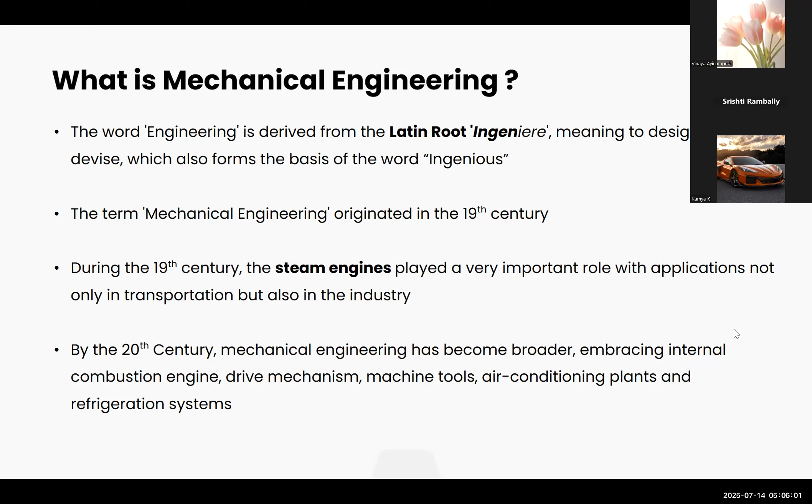The field of mechanical engineering deals with many physics concepts such as forces, materials, energy, fluids, motion, and design. Mechanical engineers usually use this knowledge to create products and solve real-world problems. Scientists normally emphasize the discovery of physical laws rather than just applying them to create new products, while engineers apply the knowledge of mathematics, science, and materials to create better technologies.

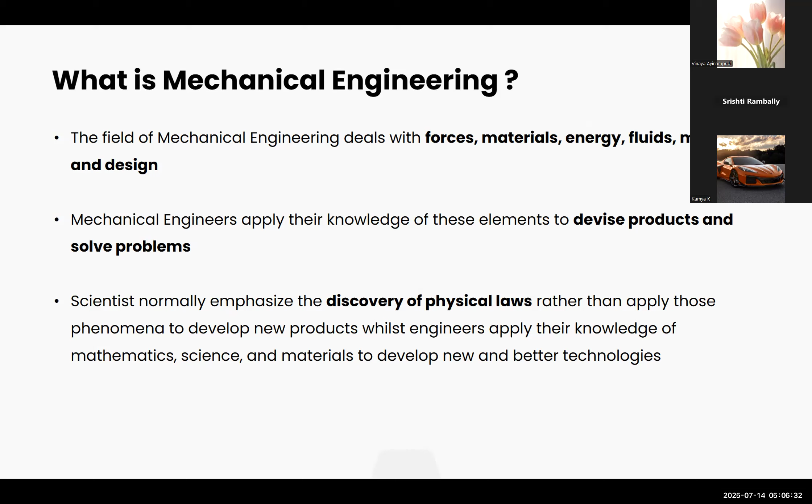And at the end of the session, we will also get an idea of what computer-aided engineering is.

Hello everyone, I'm going to take the next part of the mechanical engineering workshop. First, let us know what is machining.

Machining is a manufacturing process where we remove material, usually from a metal block, to shape it into a final desired part. This is done with very high precision, which is essential in industries like aerospace, automobile, and robotics. The three main machines used for machining are the lathe, the drilling machine, and the milling machine.

So you can see an example here, starting from a solid metal block, from which we carefully remove material and end up with a cylindrical shaft. This transformation is what machining is all about.

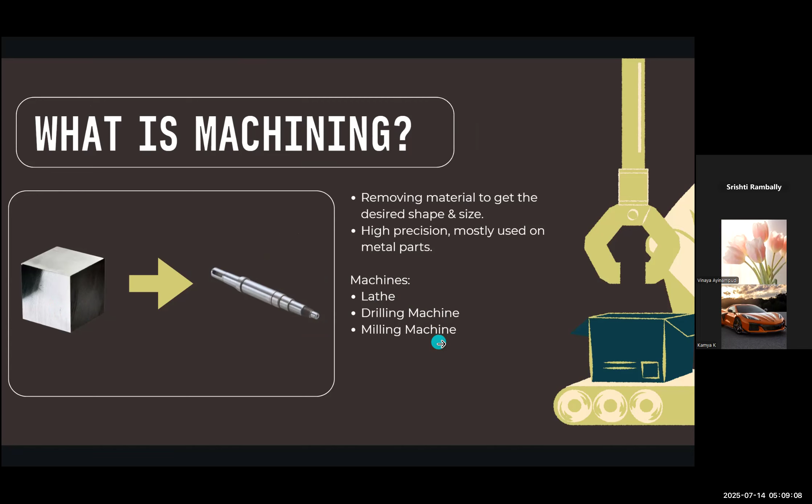Now let's dive into the lathe, often called the mother of machines, because it is one of the oldest and most versatile tools. In a lathe, the workpiece spins and a stationary cutting tool removes material. The key operations include facing, making the end of the cylinder flat, then turning, which is reducing the diameter along its length, and then threading, which is creating screw threads.

Here's the image which shows the labeled diagram of a lathe. You can spot the headstock, which holds the spindle, and the chuck that grips the part, and the tool post, which fits the cutting tool. The tailstock supports the long part, and the carriage, which moves the tool.

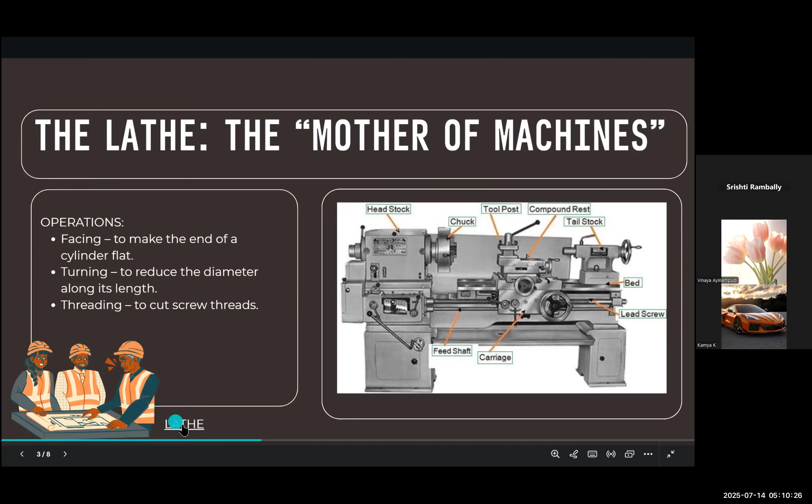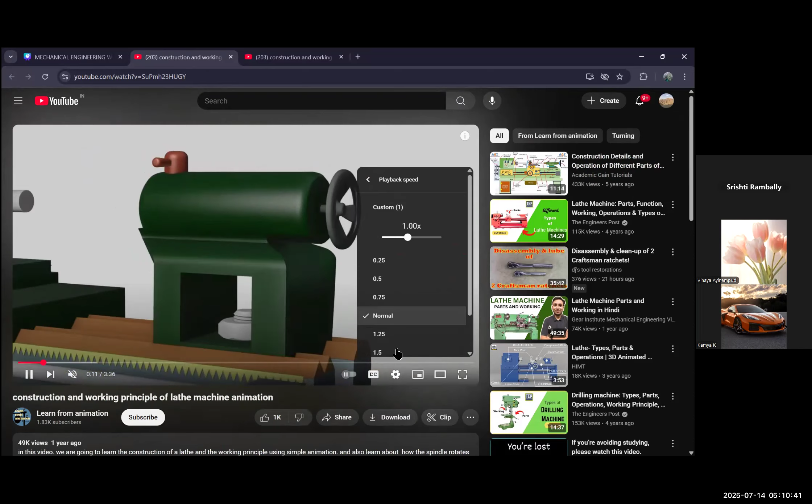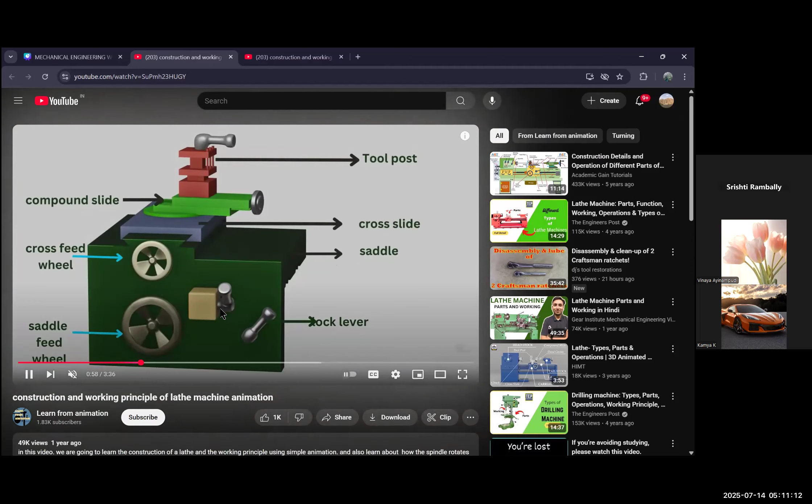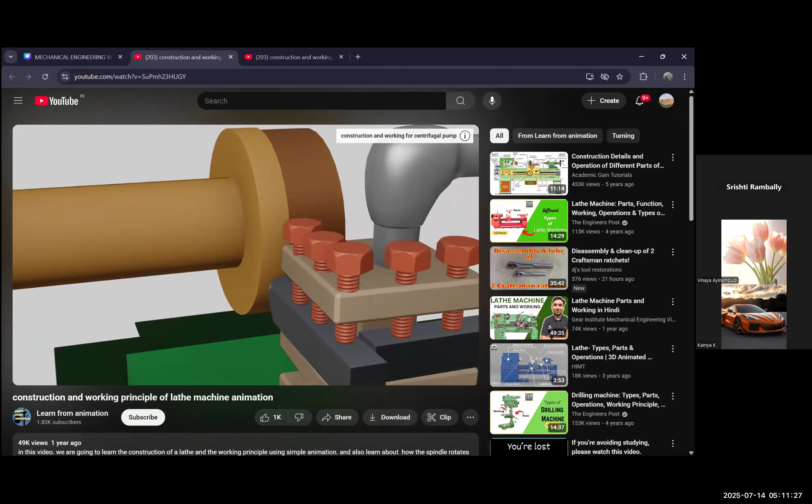I'm going to show you a 3D animation so you can understand the real working of the lathe. That's the headstock. That's the carriage. Those are the parts of the carriage. This is the entire mechanism of it, and it uses a pulley system, as we can see.

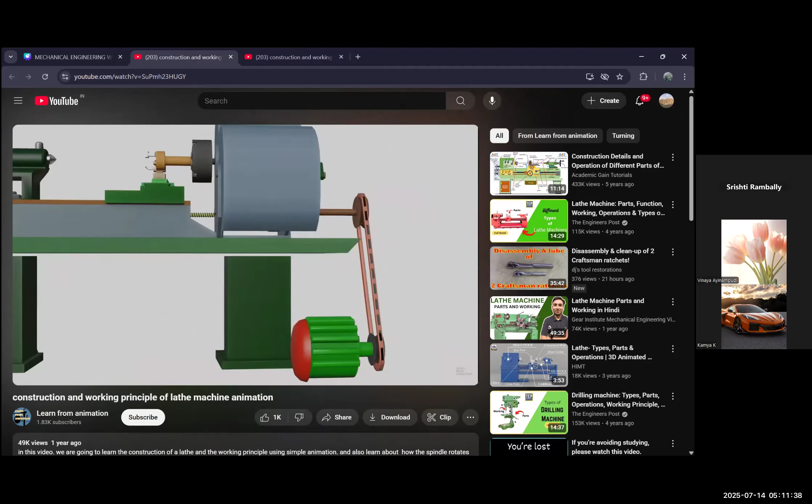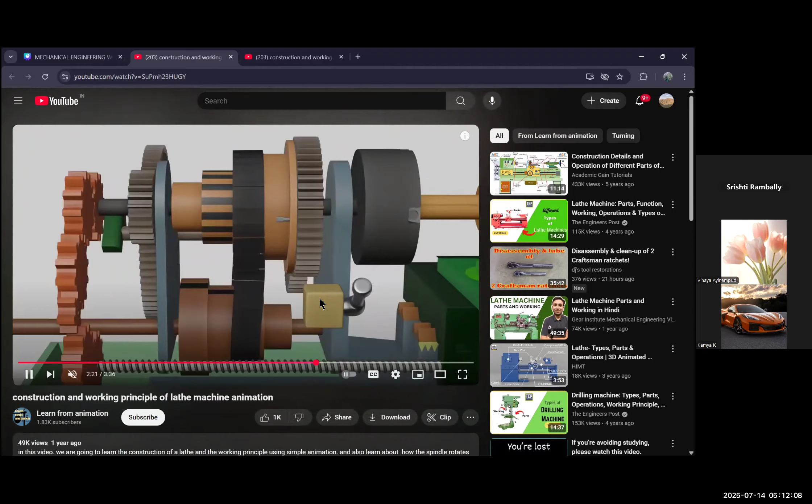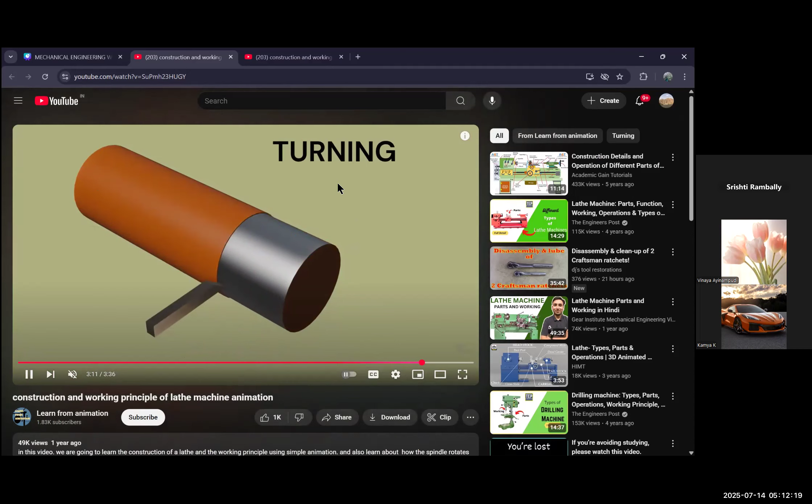So it uses a pulley system, as we can see. So it undergoes turning, facing, and threading.

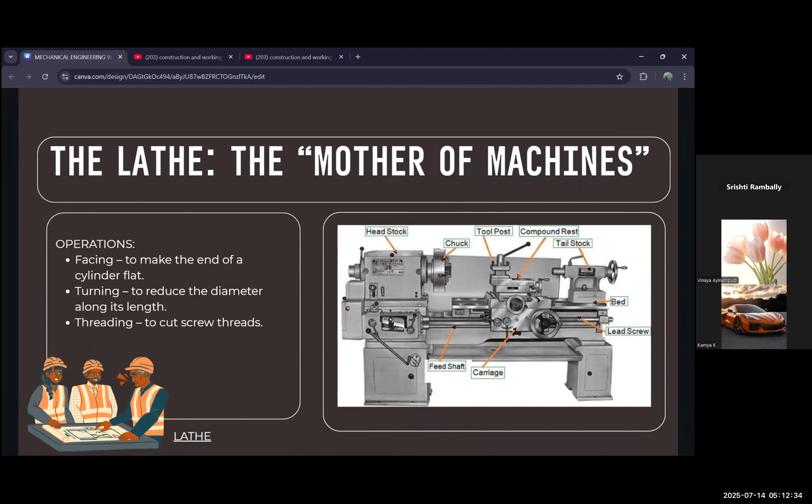Okay, let's go back now. Next, let's look at the drilling machine, which is also called a drill press. This machine is used for making holes in a material using rotating bits.

Key tips: always start by marking the center with a center punch for accuracy, choose the right drill bit size, speed and feed speed, and clear chips with a drill to avoid breaking the drill bit. You can see the labeled diagram of the drill press here. It has a spindle that rotates the bit, and a table where the workpiece rests. This is a super common machine in workshops, and it is key for all kinds of fabrications.

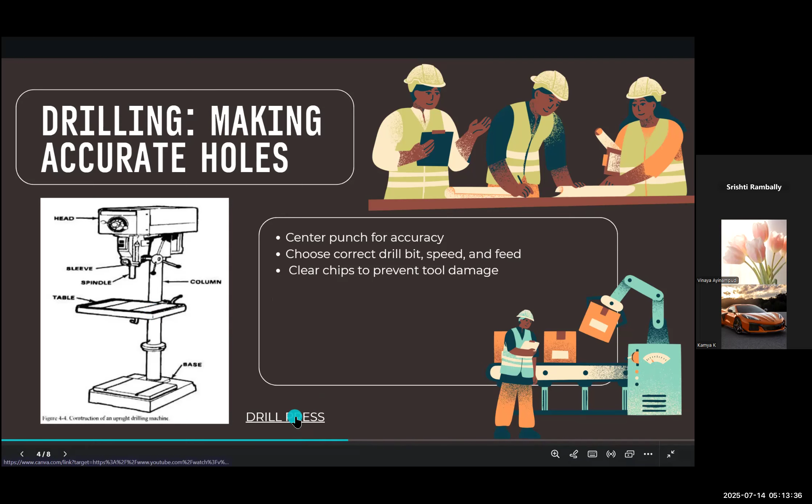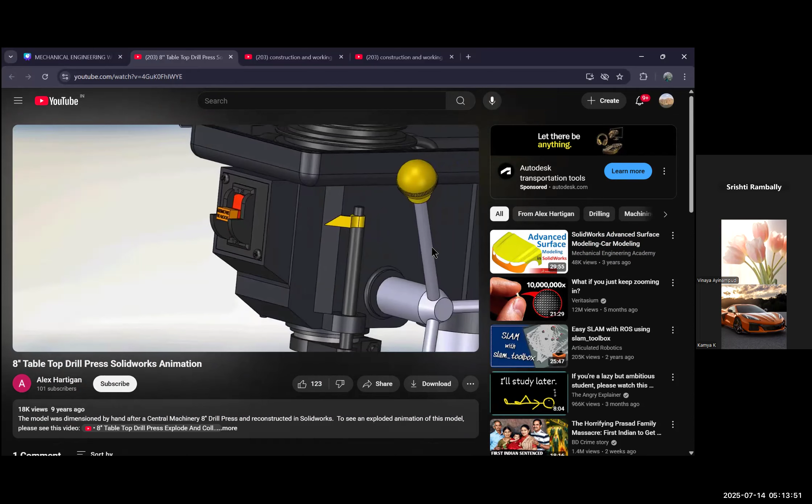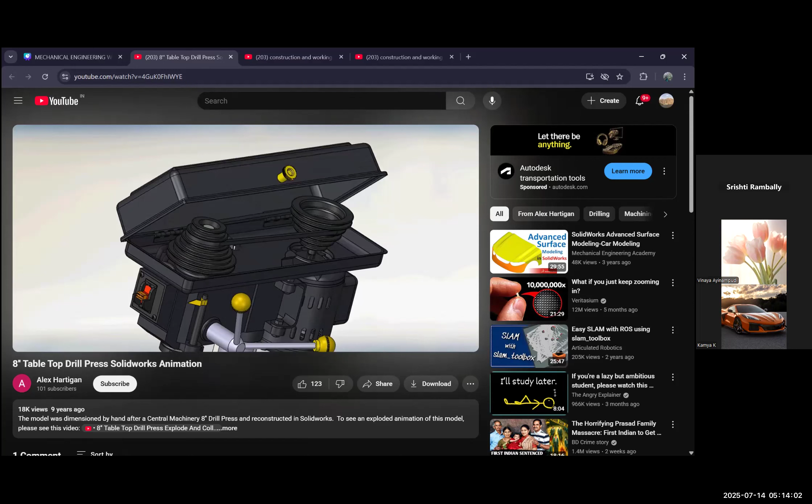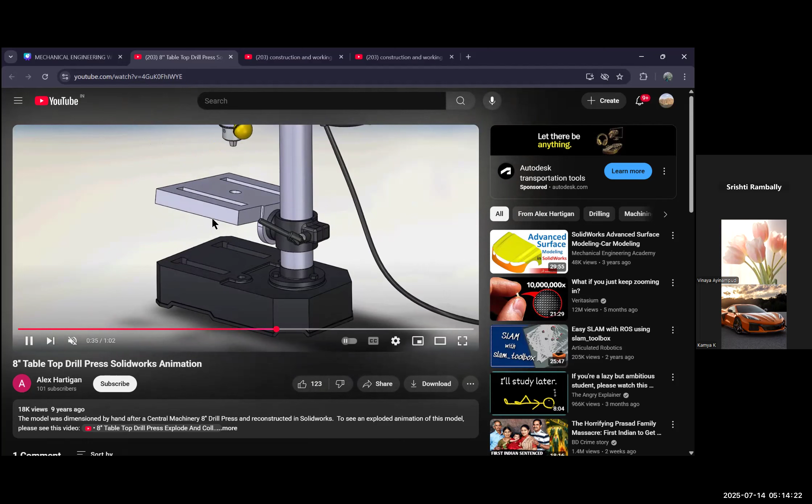Let's see another animation of the working of the drill press. That's the working of the drilling machine. The workpiece, it keeps on moving.

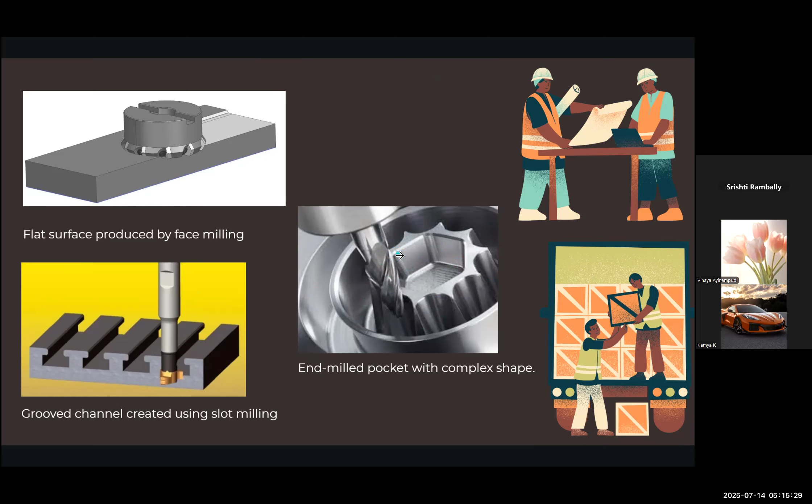Going to the next slide, let's end with the core concepts for precision machining. First is cutting speed, which is how fast the tool or workpiece rotates, and the feed rate, which is how quickly the tool moves across the part. The depth of cut is how deep the tool goes in a pass. We also use cutting fluids to cool and lubricate the process.

So let's look at this table. If you see the cutting speed, it's very low, so tools last longer but the finish isn't great. If it's too high, the finish improves, but the tools wear out quickly.

Let's go to the feed rate: if it's high, the machining is faster but with a rougher finish. Next, the depth of cut: when we remove more material, it generates high heat and stress. So tolerance is very important in machining.

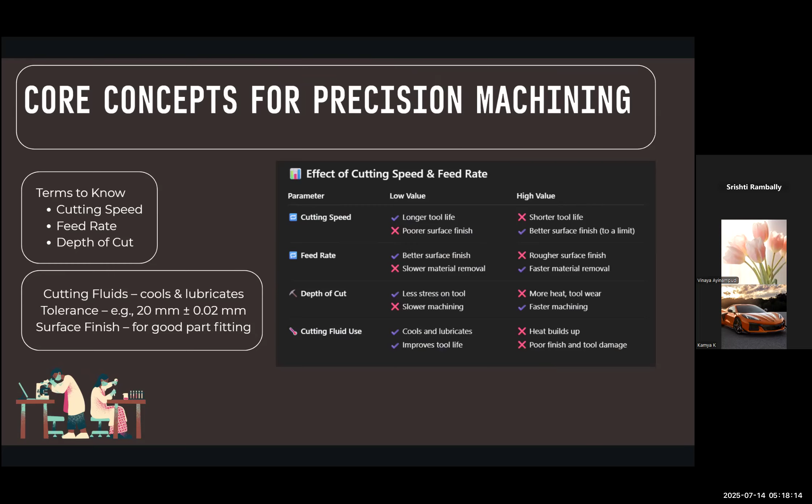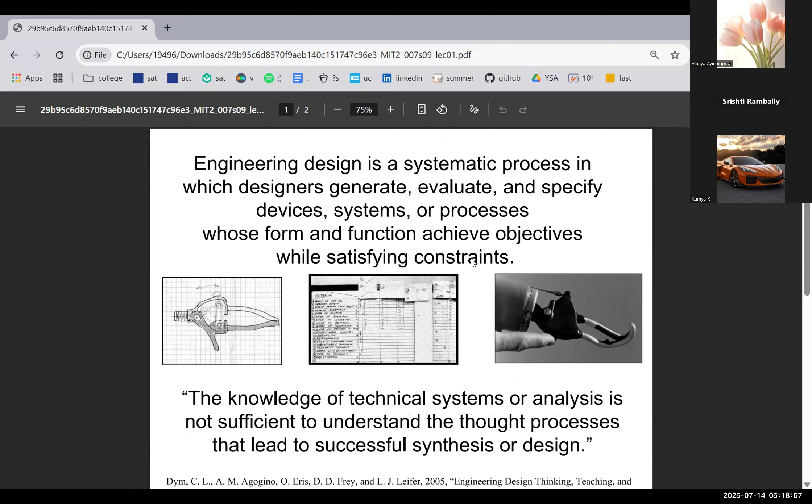So what exactly is engineering designing? Engineering designing is the process where engineers generate, evaluate, and specify devices, systems, and processes in order to create what they want through constraints. For example, if I want to create something with certain rules, I will have to apply those constraints while keeping in mind the design.

Here are a few examples. These would be, in real time, gears and other tools. And for these tools, we'll have 2D drawings in order for them to be replicated and seen from the internal view.

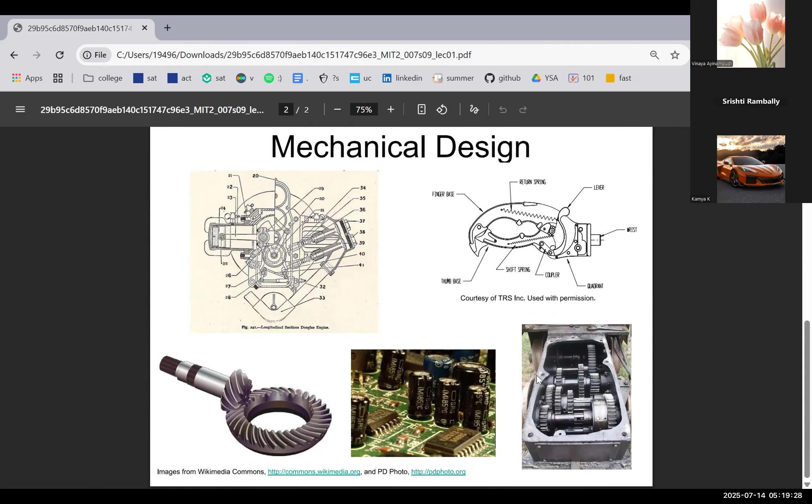So here's an example of a tool. You can see it here, it's in 3D, with different components. However, if I wanted to recreate it, how would I know what the inside looks like, the exact measurements, and other aspects?

That's when drawings come in handy. For that exact tool, we have this drawing over here. So we have this one component, and this is the top view, which shows the 2D view from the very top, labeled as 1. Then we see the second drawing, which is the 2D view of the left-hand side, labeled as 2. This is how engineers generate drawings through computer-aided design, or CAD.

And this is just one example. This can also be generated very easily nowadays. Before, you would have to do it manually, but now if you just click File and New Drawing, then from the design itself you can choose whether you want it automatic or manual. Based on this, you can choose your own templates, the width and height, and other aspects you'd like.

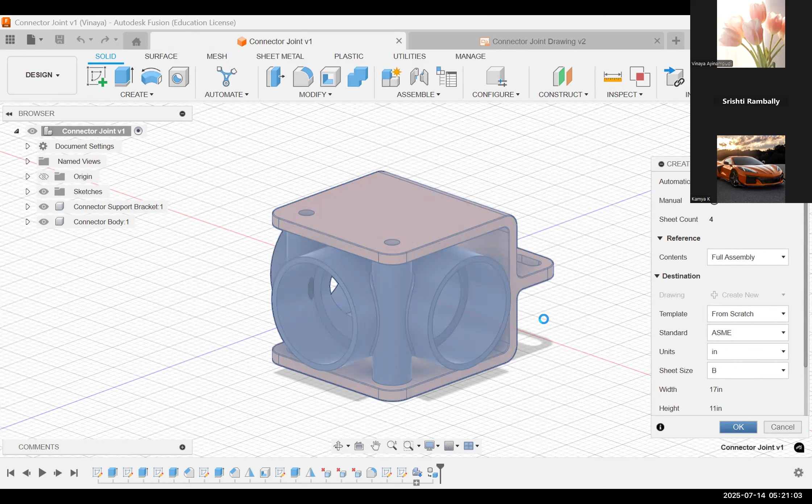So if I click automatic, it should generate a drawing based off of this tool I have, pretty similar to the other example. We'll wait a few seconds for it to load. This is a really great platform for creating 3D models, whether you want to 3D print it or just design something before actually creating it hands-on.

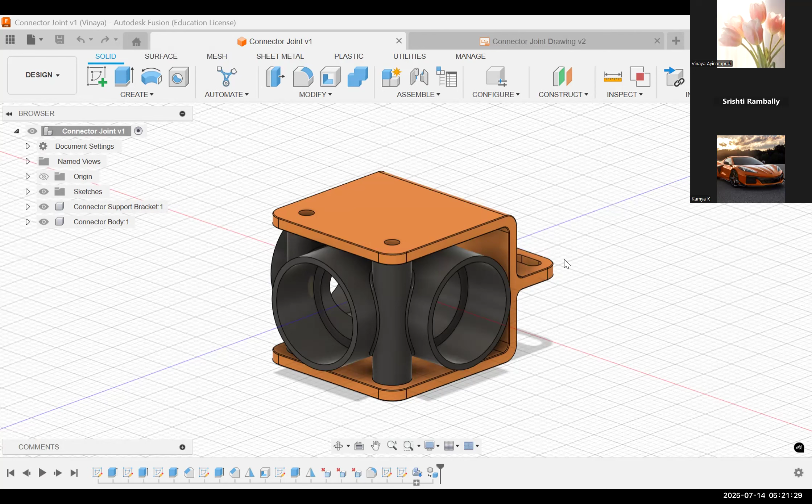You get a little notification here letting you know how it's going. But overall, the drawing would end up looking like this. It's really important to make sure whether it's measured in the metric system or in inches.

There are different symbols here. We can see these circles with a little dash between them, that's for the diameter of any circles found on the design. We also have these for the angles, the radius of the circle which creates the angle. I'm not sure if the drawing will generate right now, but it will look just like this.

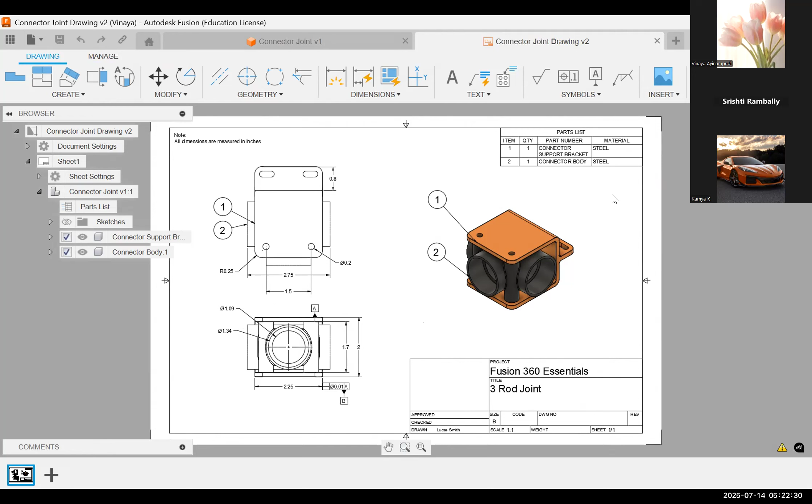That is a little example of what engineering designing may involve. This is something you will learn in college if you want to become a mechanical engineer, as design and communication is very important. As an engineer, it is a core fundamental skill.